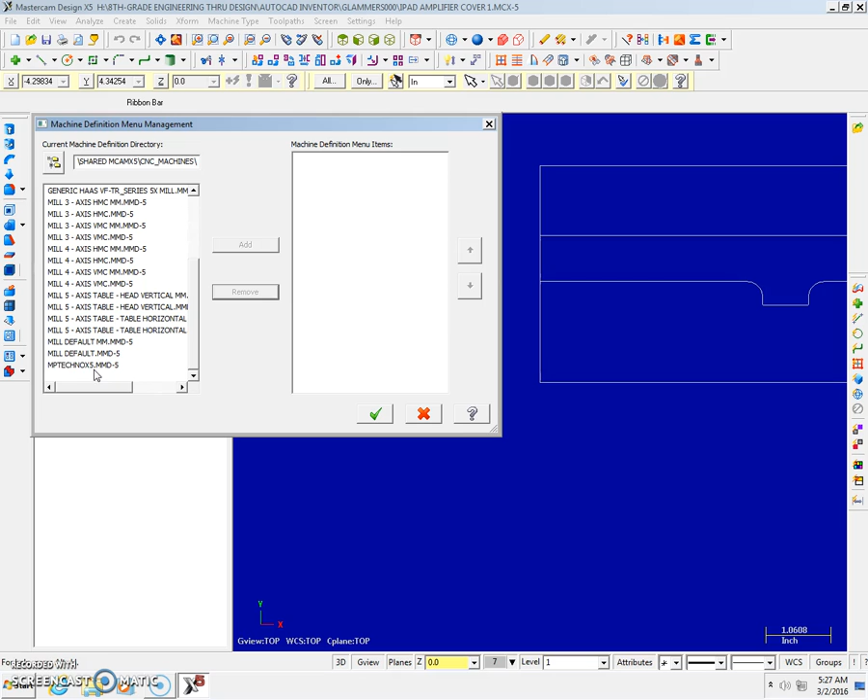Over on the left hand side, I'm going to scroll all the way down. I want to find MP Techno X5 right here. Click, select add, green check mark.

Now when I go to machine type here at the top, go to mill, it shows me my mill definition right here, MP Techno X5. Click to select this.

Then in properties on the left hand side, Techno Mill, I'm going to click the plus mark, and I'm going to go to stock setup.

I'm going to select the top left hand corner. I want to make sure that X, Y, and Z are all 0. I'm going to select and click the All Solids button, and then I'm going to green check mark.

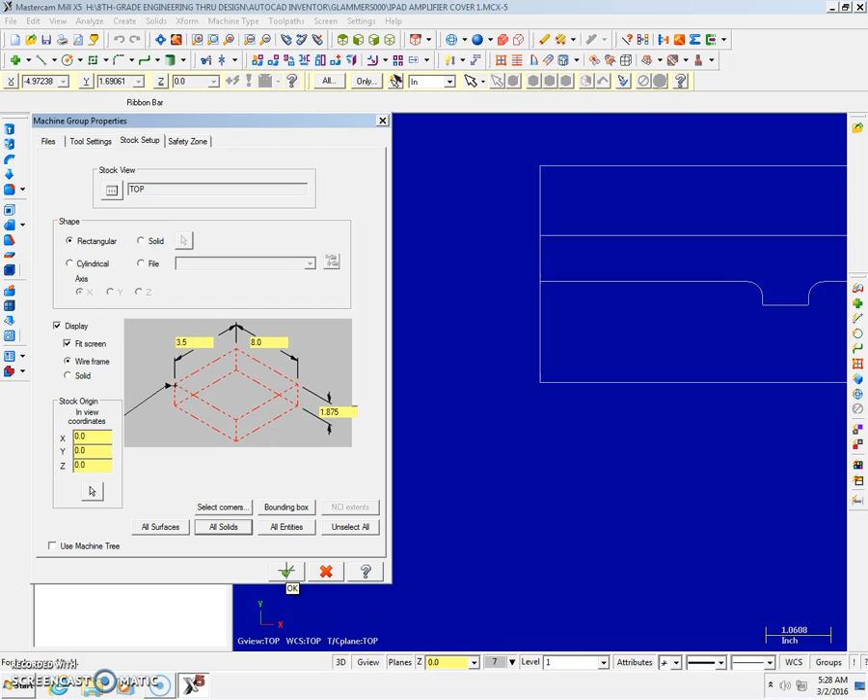Next, I'm going to go up here to the top. I want isometric, that wireframe looking box that's up here in green. Click. And next I want this blue circle here for shaded. Click to select this as well.

Next we're going to fit screen. This icon right here, we're going to click fit.

Now we're going to tell the mill how to cut our part. We're going to go to toolpath. We're going to pull down to pocket.

Right here this should read your last name and then cover. If this does not read your last name and then cover, type that in here. Otherwise we're going to click green check mark.

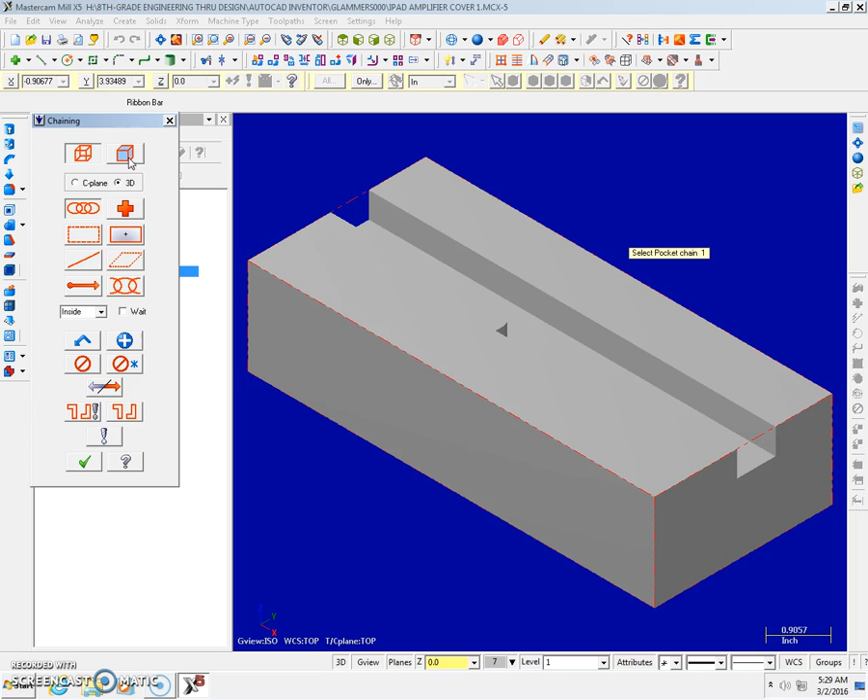We're going to click the All Solids 3D button right here. And then we want to select this bottom surface that is going to get cut out for our iPad to stand in. Make sure you're not on the top or the edge. We want to be on the bottom surface that's cut out. Click to select it. Green check mark.

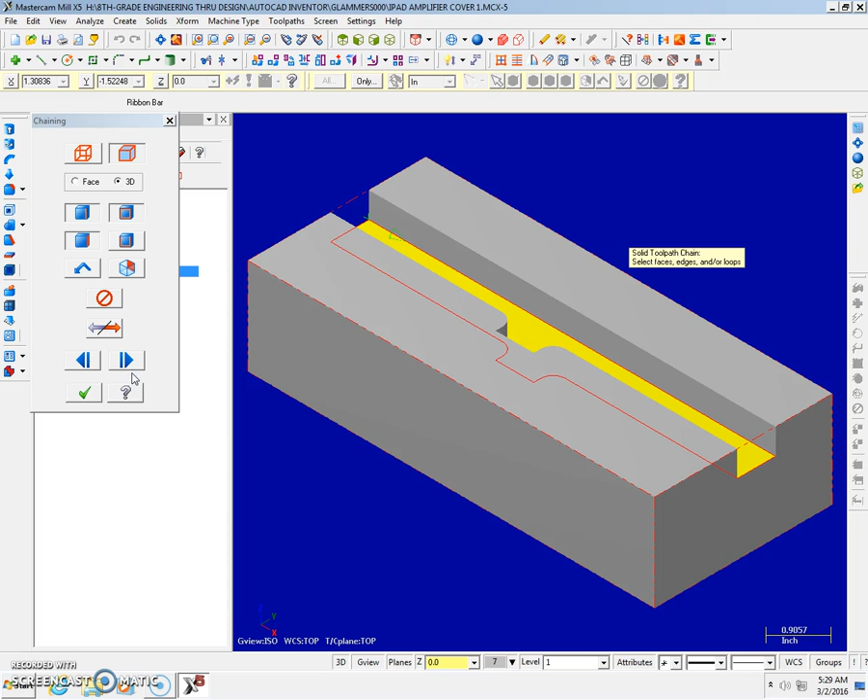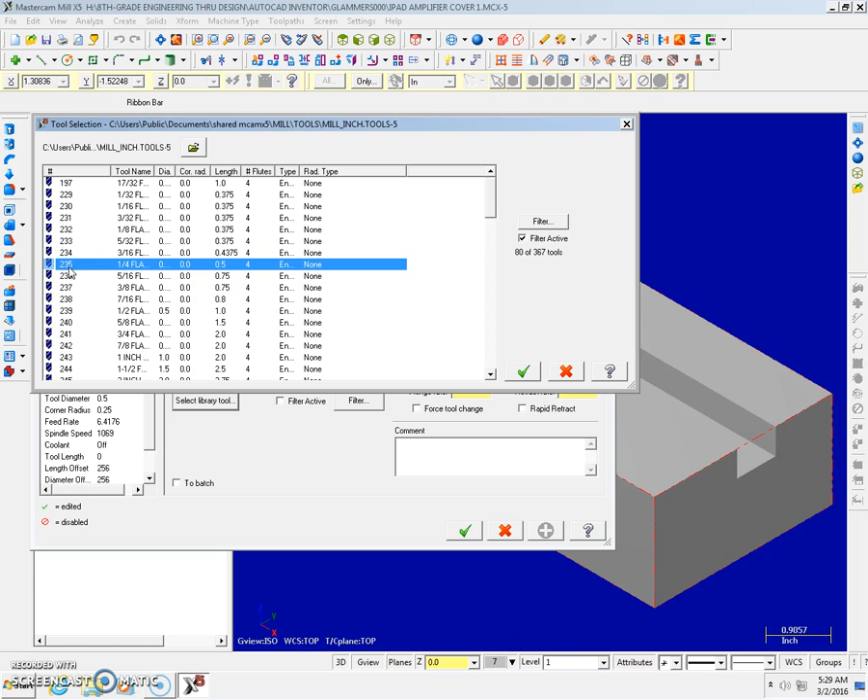We're going to run through this menu here on the left hand side. Starting at the top, we're going to select tool, select library tool. I want to choose a 235 end mill, which is a 1/4 inch flat end mill. Tool number 235, green check mark.

Next I'm going to go down to cut parameters. I want to make sure that this says standard here. Moving down, I'm going to go to entry motion. I'm going to turn my entry motion off.

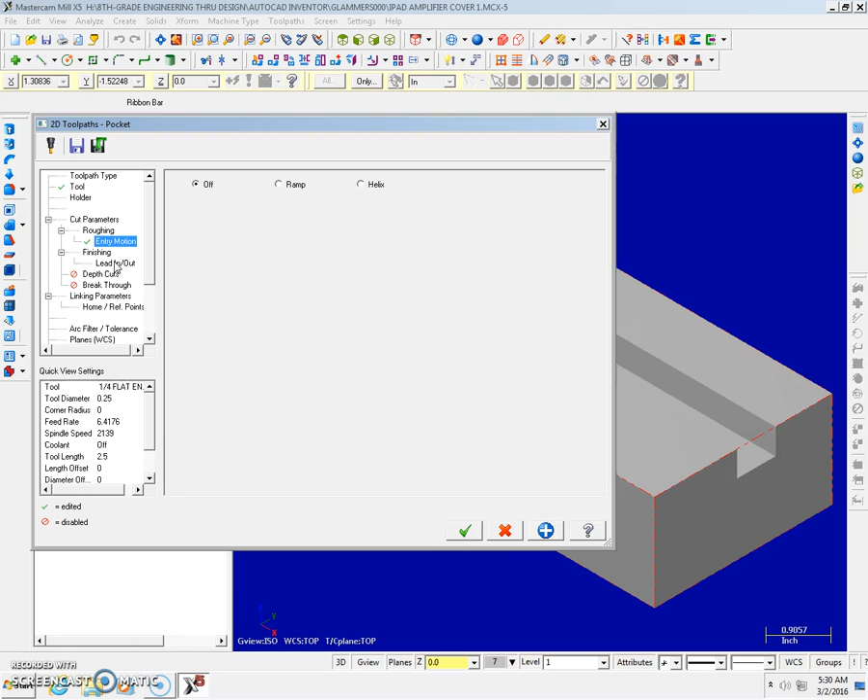Continuing down this menu, I'm going to go to lead in, lead out. Oh, I skipped one - finishing. I want to make sure that I'm at computer for finishing. Lead in, lead out - I'm going to click to select that and turn it off.

Next, I'm going to go to depth cuts. I want to turn my depth cuts on, and I want my maximum rough step to be 0.25. Type that in right here, 0.25.

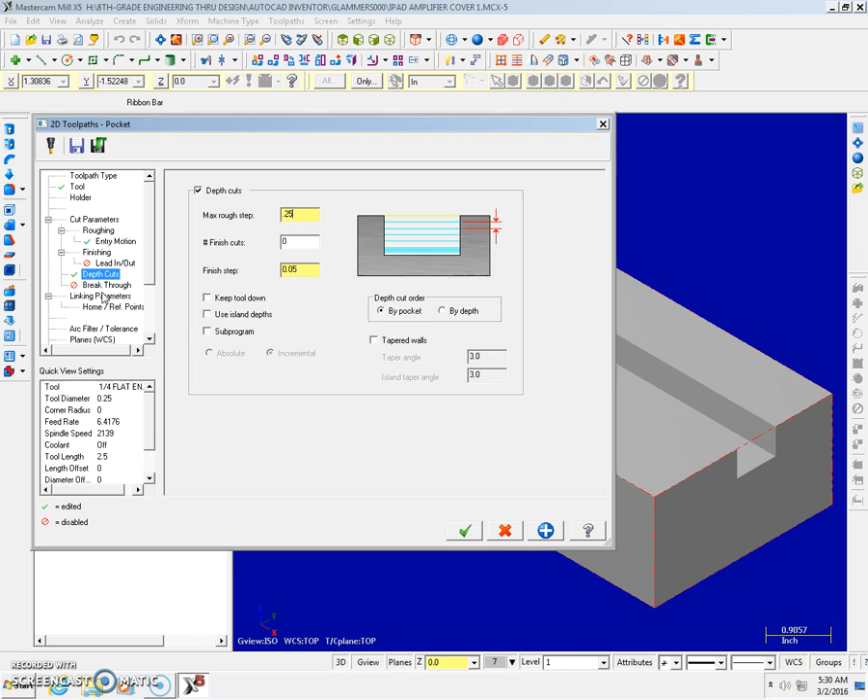Next, I'm going to go down to linking parameters. I want to make sure that I have absolute for retract, absolute for feed plane, absolute for top of stock, and then I'm going to click the green check mark.

Your screen should have a bunch of blue lines on the inside of it. That's the tool path that is selected.

Next, we're going to go up to our Operations Manager. I'm going to click the G1 button up here.

I want to make sure that the NC file is an NCD right here. This check mark reads NCD. Green check mark. I want to make sure that I'm saving this to my H drive.

So I'm going to go to my pull down menu here and I want to find my H drive. First initial, last name, 000 is what I want this to look like.

The file name in here, iPad amplifier cover, I'm going to leave the same. I'm going to click green check mark. Green check mark.

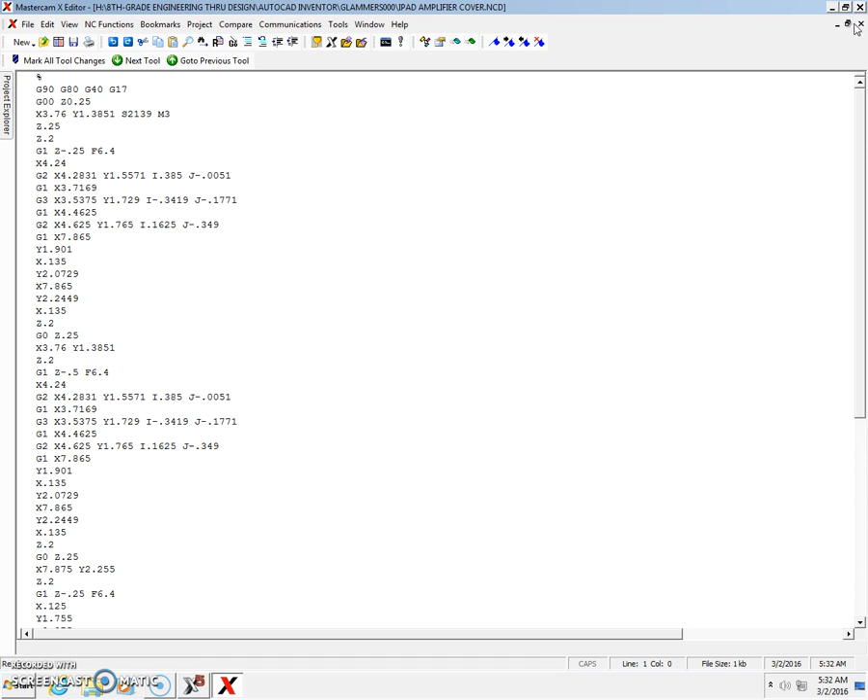After I click save, this Mastercam editor is going to show up. I want to X this out in the top right hand corner.

Next, I want to verify my selected operations. So I'm going to click this shape here, verify selected operations, and I'm going to click play.

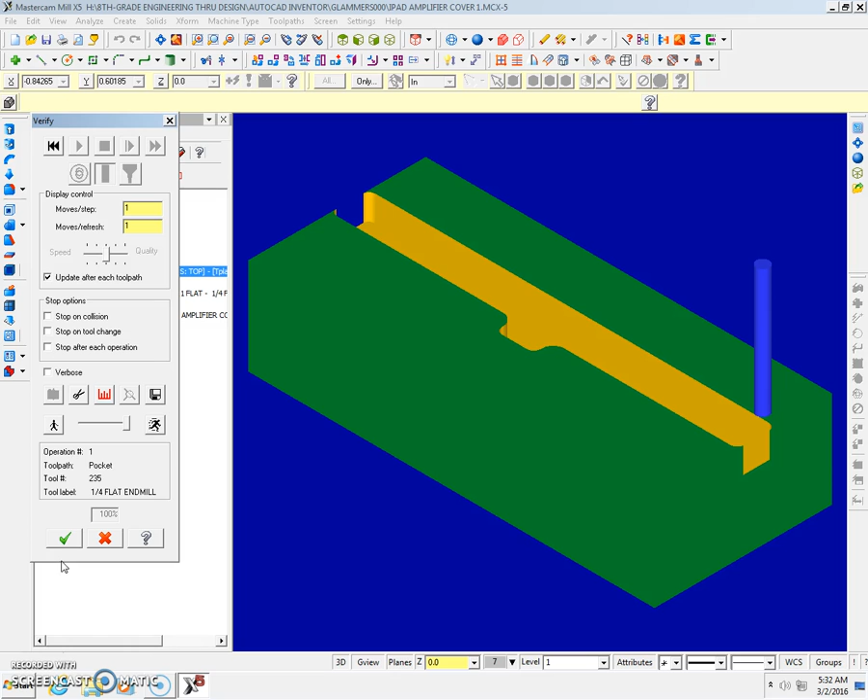Right here is where you want to take a break and call Mr. Lammers or Mr. Bowen over in order to check your work so that your part will cut correctly. When they're finished, green check mark.

Next, we're going to go up to the X in the top right hand corner. We're going to close out Mastercam. Are you sure you want to exit?

Yes. The MCX-5 file has changed. Would you like to save it? We're going to click yes.

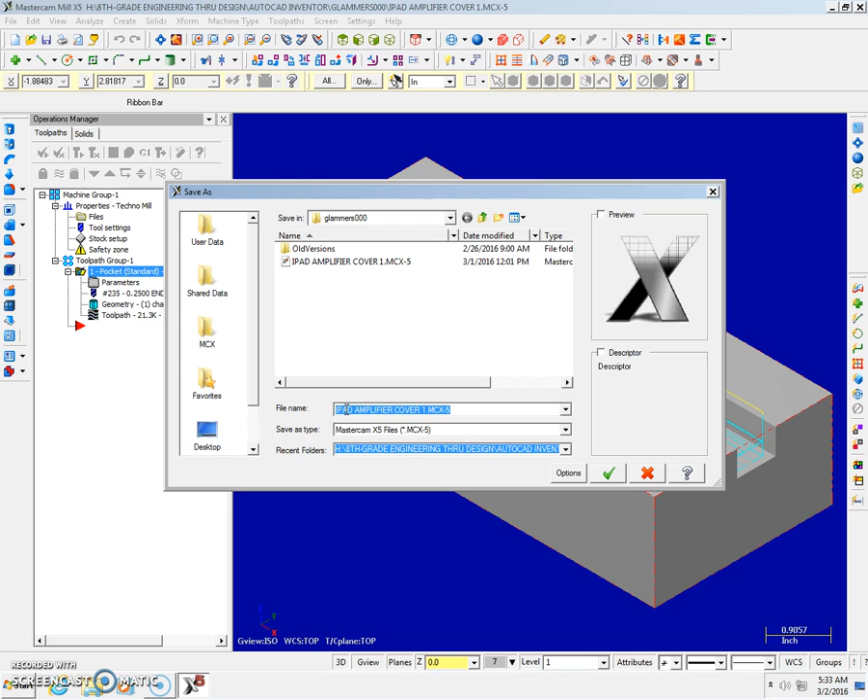We're going to save this to our H drive. First initial, last name, 000. Leave the file name the same. Green check mark.

I already had one saved there, so I'm going to replace it. Yes. Next, I want to cut my part.

I'm going to go to CNC mill here on the left hand side. I'm going to translate execute. I'm going to be in my H drive. I can select that by coming over here on the side.

Get my H drive. Then I'm going to choose my part, my iPad amplifier cover, NCD file. Click to select it, click open.

We're going to select OK on this menu, and then we're going to preview. This is where you're going to call your teacher over to come and check your work.

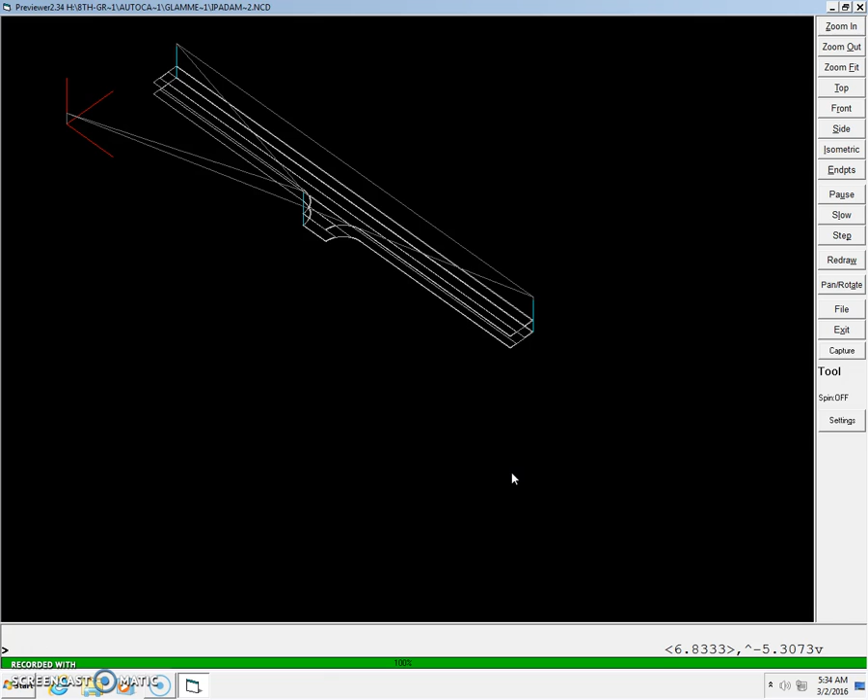He's going to have you type the letter S and then F on the keyboard, and then they want to take a look at it like this. We're going to press exit here on the side, or you can press the escape key on the keyboard.

Next, we're going to jog. Jogging tells the computer and the mill where the mill bit is going to start at. We're looking for X as 0, Y as 0, and Z as 0. Once you have these zeroed out, we're going to exit jog.

And then you're ready to click start once your part is loaded in the mill. Congratulations, you are finished.